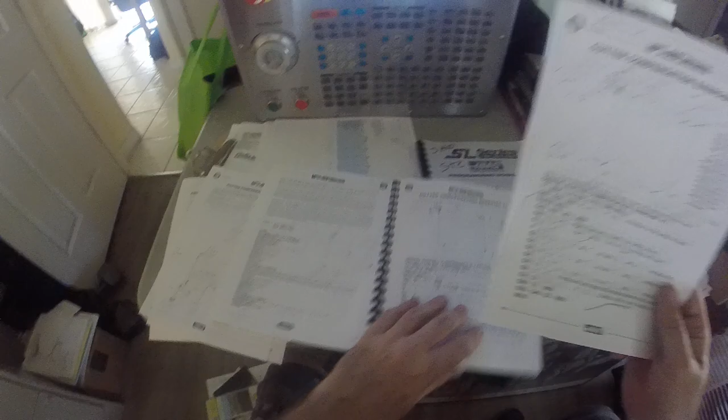I'm going to do a little more talk about my Haas programming workbook. I was given two of these, mill and lathe, in class. Good thing I found it, but I was on my Google Classroom and my teacher gave me these to download, the pages and the whole PDF file. So this is my exercise out of this book, which is page 66, right here.

And I was told to read from page 60 on, discussion of cutter compensation. And I noticed there were some examples and why you would want to use it and stuff.

And I got some, oh, is that my phone? Okay.

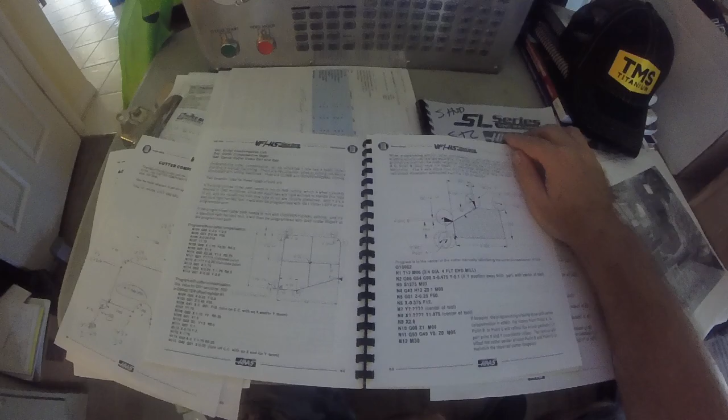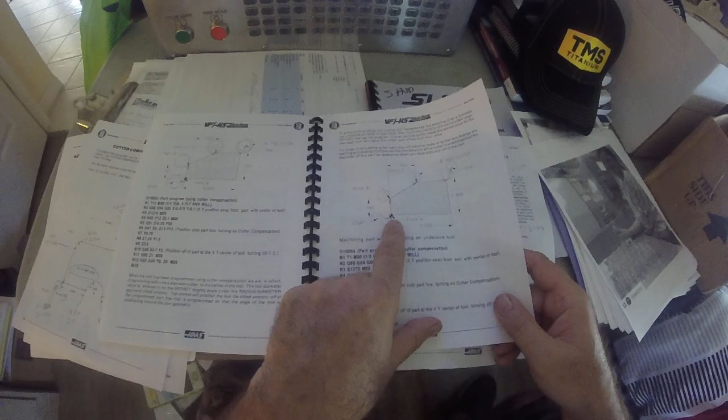Looks like there's a lot of math involved here and why you would not want to do it that way. It's very hard to figure out where the tool center is. So these are a part program using cutter compensation. This is a good sample right here. And another good sample. So we can look at that using an undersized tool, which means it doesn't matter what size tool, I guess. You can just compensate.

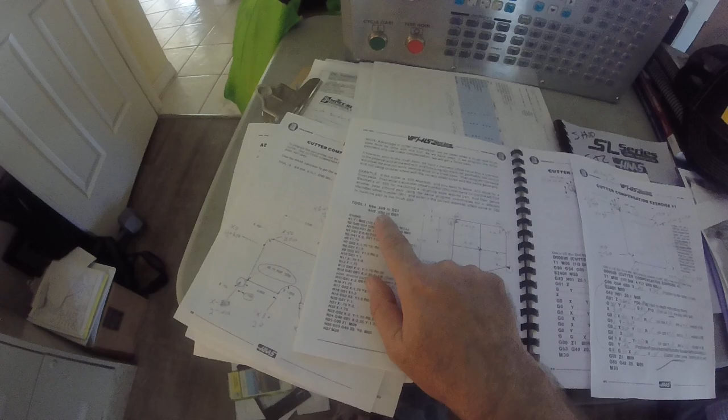And another one here talking about using it as a roughing and finish cut. So if you gave it a separate D number using the same profile, you can make one tool be a little bit bigger than the other. So this would be finish tool, that'd be roughing pass. Or you can even separate the tools, I would imagine, like if you're cutting steel.

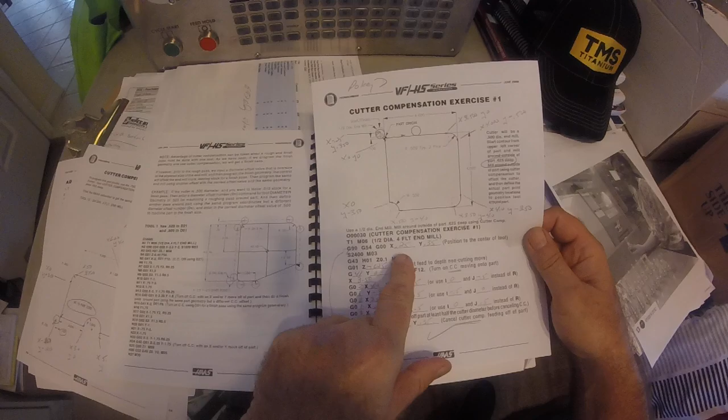So here's I found my book, but I was able to download this on my Google Classroom. So I did what my teacher told me to do, is write down all my X and Y coordinates here. Oh, I think I need some light. There we go. Okay, so I wrote down all my X and Y coordinates here. And I have the example over here. And I can start plugging in the coordinates. And he told me to scan it, so I took a screenshot and submitted it for grade.

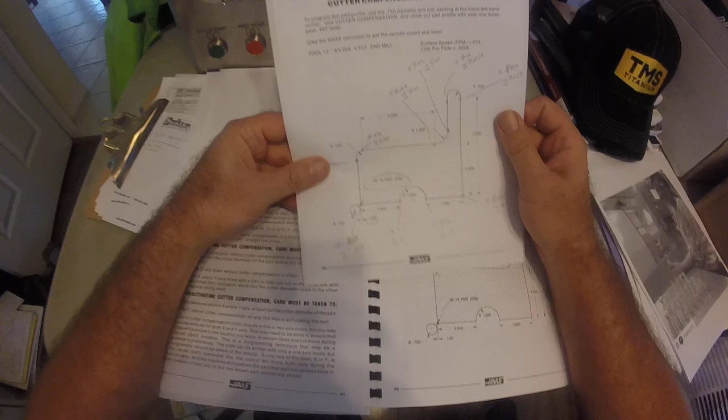And then he said to go on to compensation number 2, which I had already downloaded. The advantages of cutter, more reading, okay. So I did the same thing here. I got my 0. I figured out all my X's and Y's. Okay, and then it said here what size tool. And in this one, you need to calculate feed and speed.

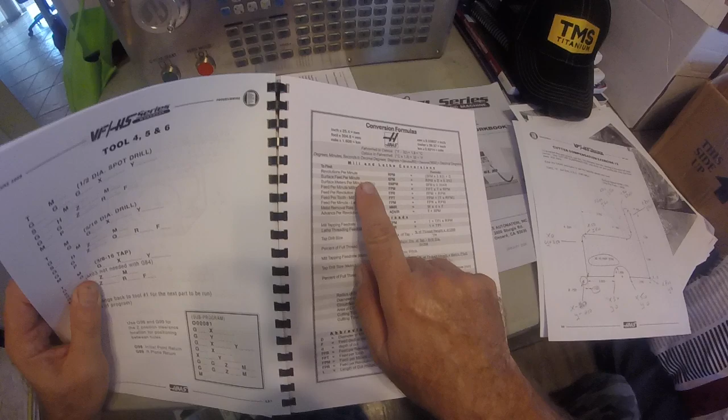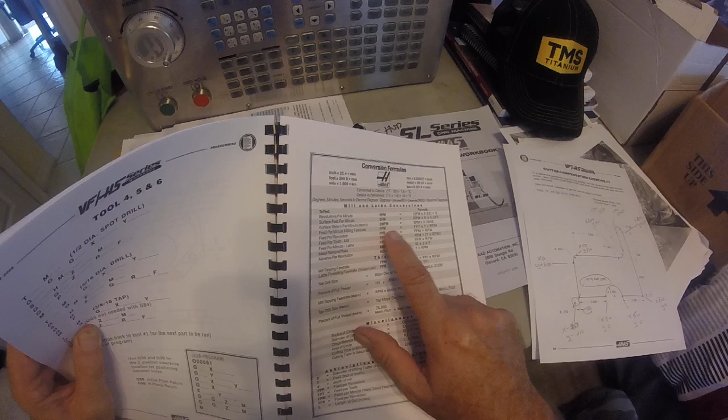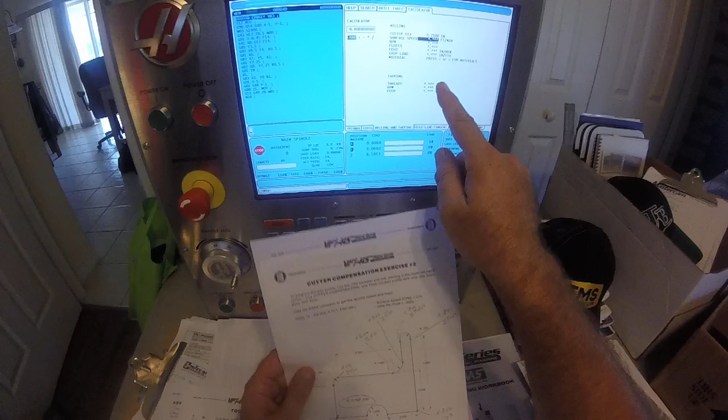Now, I know in my book, good thing I have my book now. I'm sure I can Google it. It's right here. Revolutions per minute equals surface feet times 3.82 divided by D, diameter. And inches per minute, feed per minute, is feed per tooth times teeth times RPM. So I got all that. I got a 4-flute. But I actually found this calculator right in the control under help.

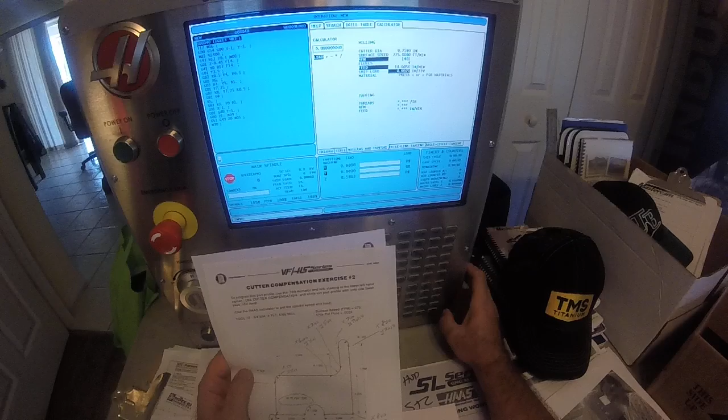So here I am, I'm plugging them in, and it says 275 feet per minute. And that's 1401 RPM. Oh. And it says 4 flutes. And feed is what I want. It says chip load, or per tooth, 0.0025. Oh, 14.05 inches a minute. So there's my,

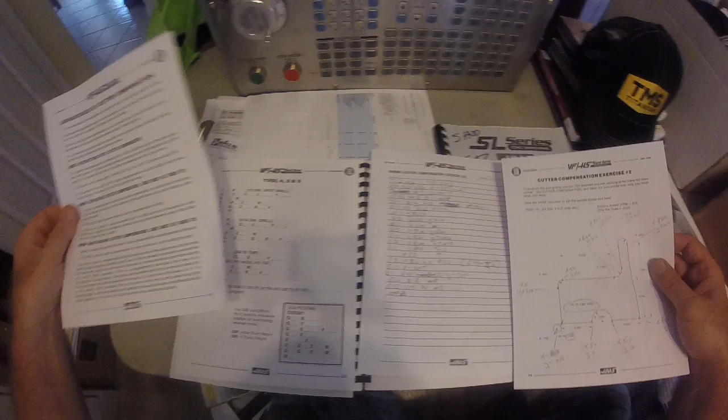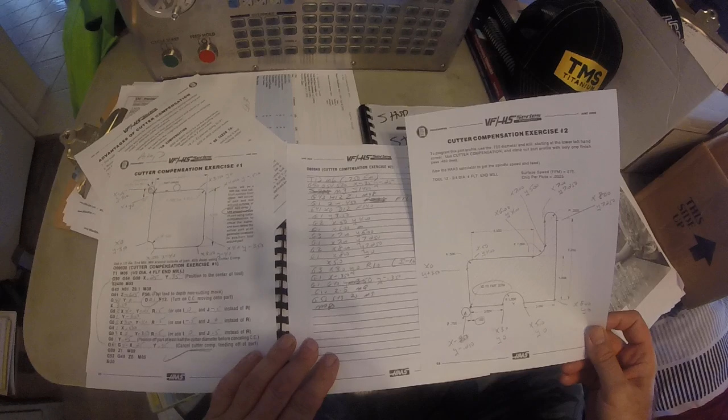and I wrote the program by hand because now I had, where's my other page now? Oh, here it is. I had a good sample. So I started plugging in the numbers. Only I'm using tool 12. I got my RPM figured out. I had 1400, yeah. 14 inches a minute, yeah. I'm using H12 and I'm using D12 to match. And I plugged all these in and I hand wrote them in here. And I got my program right here now.

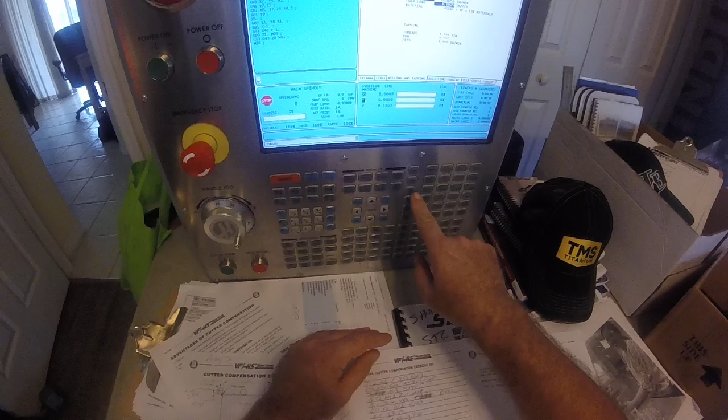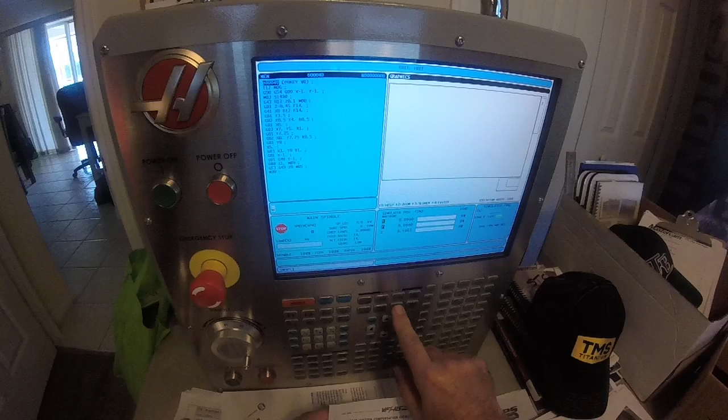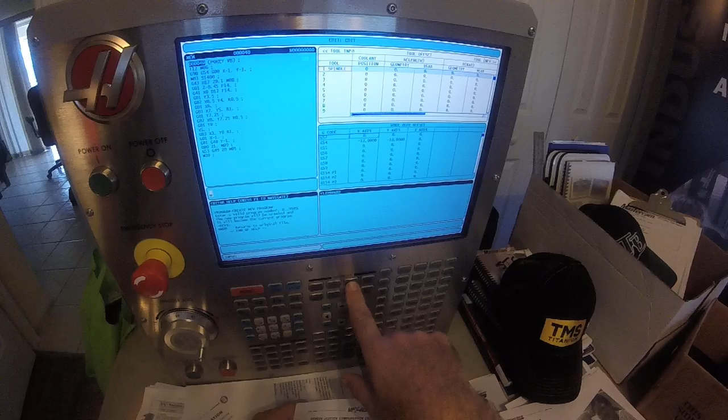I typed this in by hand right here. Pokey T12, just like this. Okay, and then I go to my graphics page and hit cycle start. There it is. I even went into the tool register. Where's this tool? Right there. I had to put these numbers in because it says radius, so I had to be careful. I was told that sometimes these say diameter, sometimes they say radius, so I got radius in there.

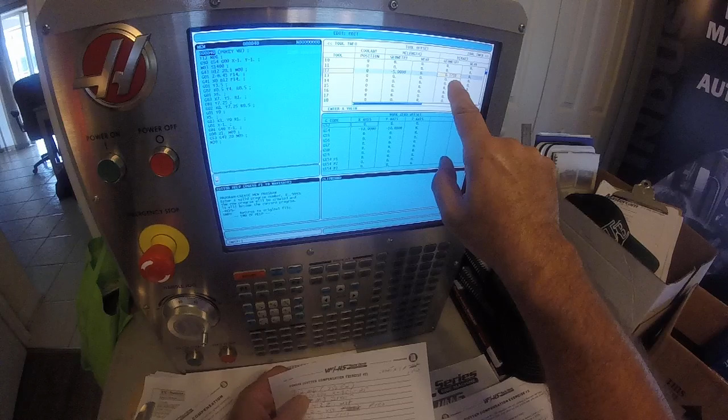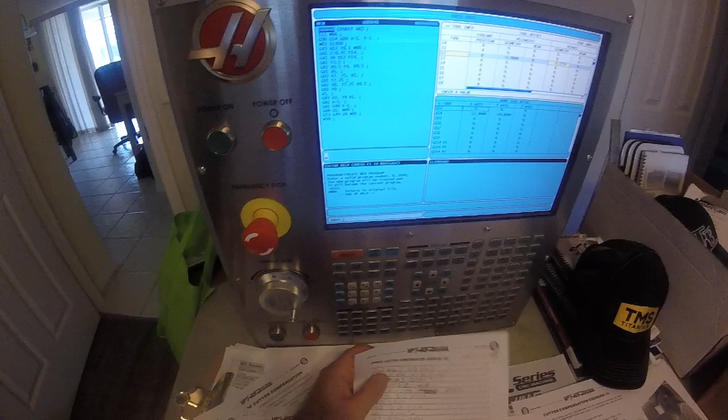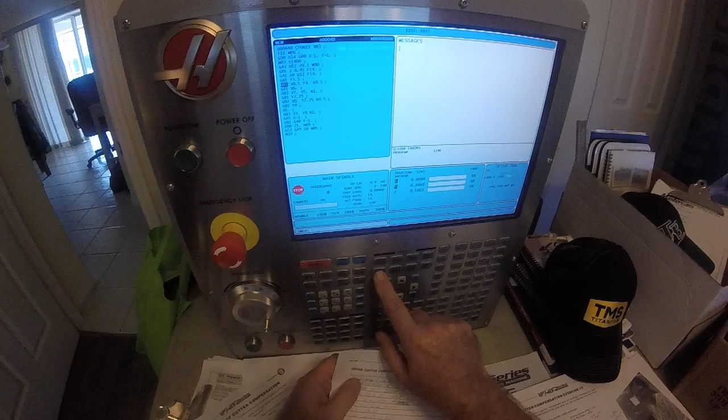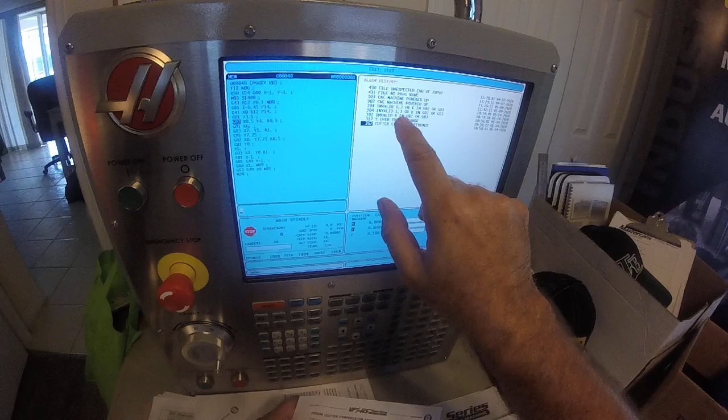And we had to put some false numbers in to get it to work because it was actually hitting an over travel condition. We had to adjust the Y-axis. And then originally I had missed some of the R's, so it gave me some alarms. Let me look at the alarm messages. I was told to, right there, see? These are all the alarms I had. Cutter comp interference, Y over travel, invalid R. So these are all ones I missed in the beginning. It's even got a history here, today's date. So I was able to do that.

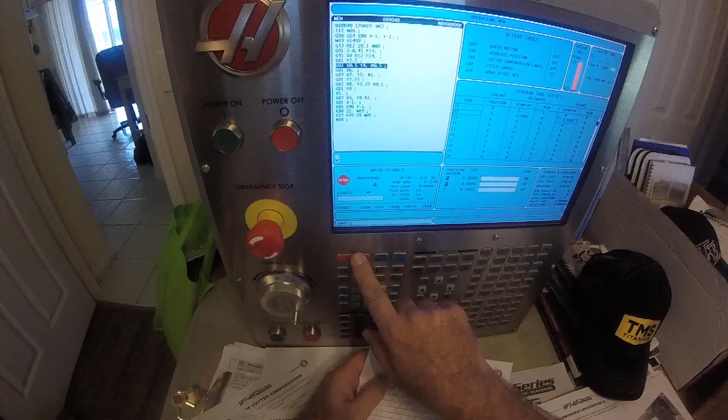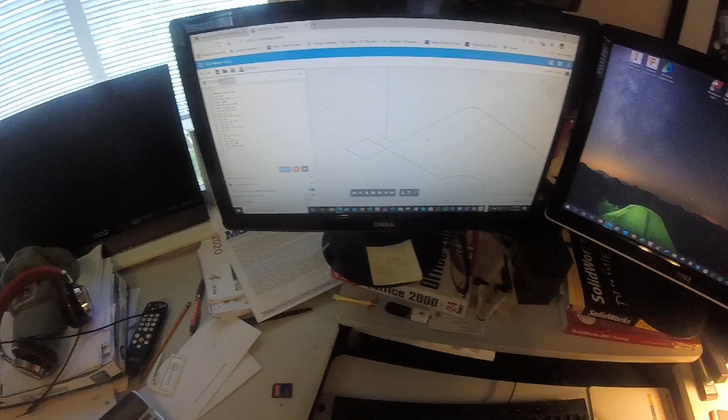And then I took the program and I downloaded it on the USB and brought it into my computer here and ran it on something called, let's go to my class. My class is here. And I'm in the B class. Class work. Here it is, Cutter Comp, and use NC Viewer, this one right here. So I had my USB, oops, I don't want to save that one. I'm going to open, there's my file, 40 right there. Open, and there it is right there. It's all right there. So I didn't really need the simulator.

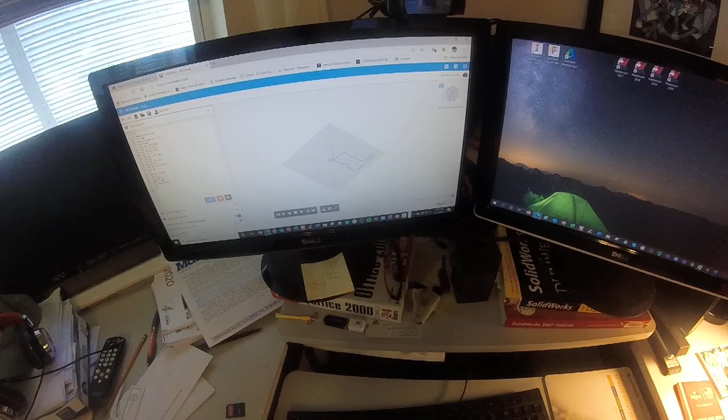Let me get the view here. Yeah, right there. You got a little bit. Home, top. How do I move this over? Oh, it's rotated. Home, top. Can I rotate this? I'll go to home view. Alright. Alright, so here's my program. It says Pokey WB. I loaded it in. Yeah, I just loaded it in. I can have my digital readout on or not. Vertical Z up. And you actually can do lathe. Look at that, it does lathe.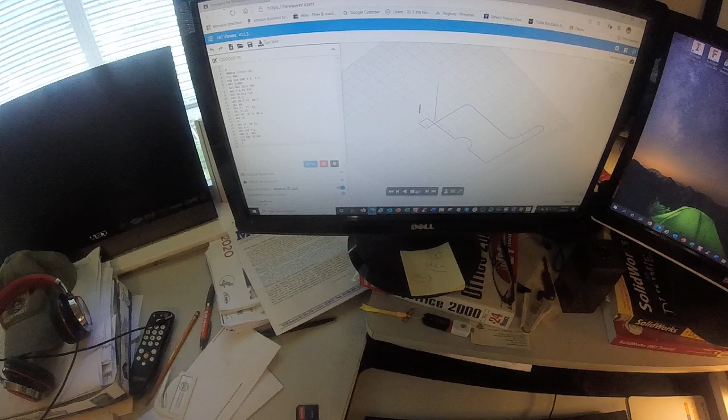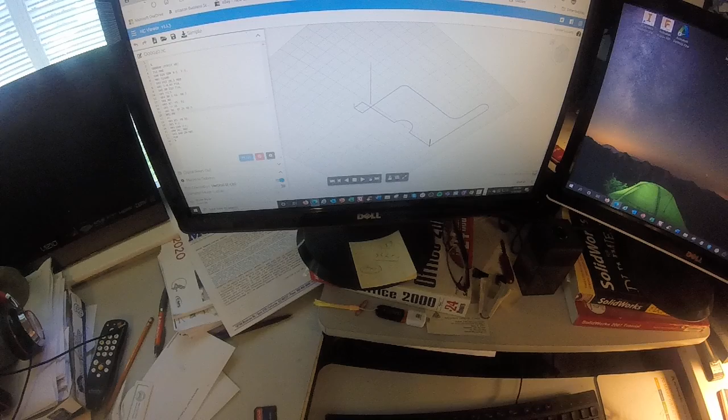And I'll hover over this. That's play. That did everything. Let me rewind this. Alright. What's this one? This is like single block. Single block, 1, 2, 3. There it goes. Down, over, curve. G3, G1, G2, G1, G1, G3, G1, and cutter compensation off and up and go home. That was it. So I got a real good handle on this, how this works. So when I actually had some issues, I was able to fix as I went along. So this is a pretty good tool here.

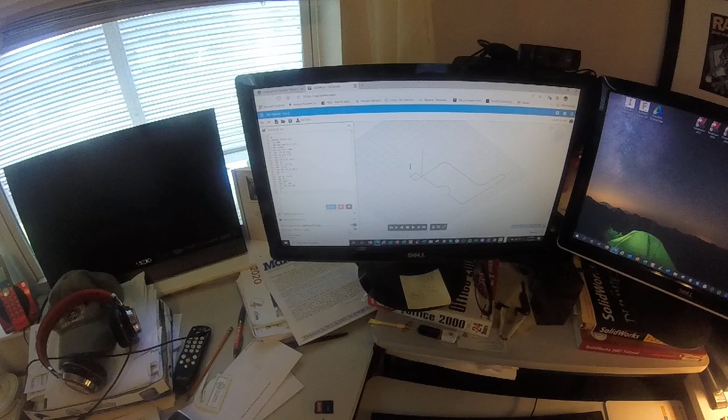So right here was my class. I had Haas workbook, some videos. Right here is the workbook online, everything right here. The page, these are the pages. I downloaded those. So now I need to submit this, the last part of the puzzle, until I ran it in the viewer.